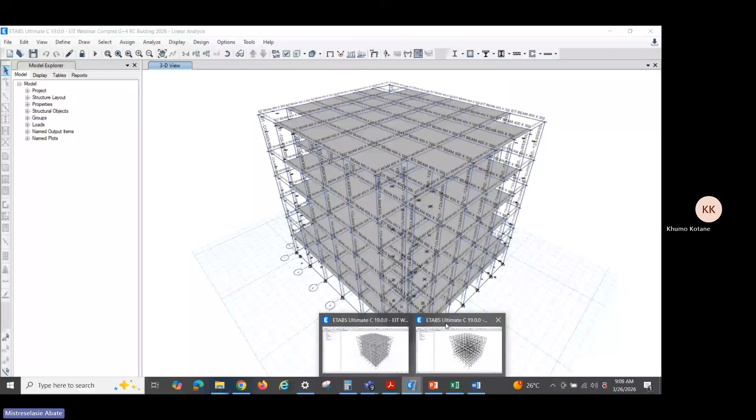Great. Okay, so what we are going to do, performance-based design in practice, and we will go here to the software also. We have ETABS software for linear analysis, and we have also another for nonlinear analysis.

So today's agenda will be structural modeling for PBD, including material property, section definitions, and load pattern and performance objectives based on FEMA 356 and ASCE. We will use also ASCE 41-17 guideline. Then we will see also pushover analysis, evaluating structural performance and overview of performance-based design. And if I can, I will show you also how to transfer from ETABS and SAP to Perform 3D for assessment, focusing on structural behavior and nonlinear analysis techniques and so on. So in general, don't worry, we are going to talk a lot today.

Module 1 will discuss why we need performance-based design and why code-based design is insufficient for performance levels like immediate occupancy, life safety, and collapse prevention. We'll cover earthquake hazard levels like service level, DBE, and MCE level, then the modeling part for linear analysis, initial code-based design, and how to transfer from ETABS and SAP to performance-based design, including material definition, section, diaphragm, and load cases.

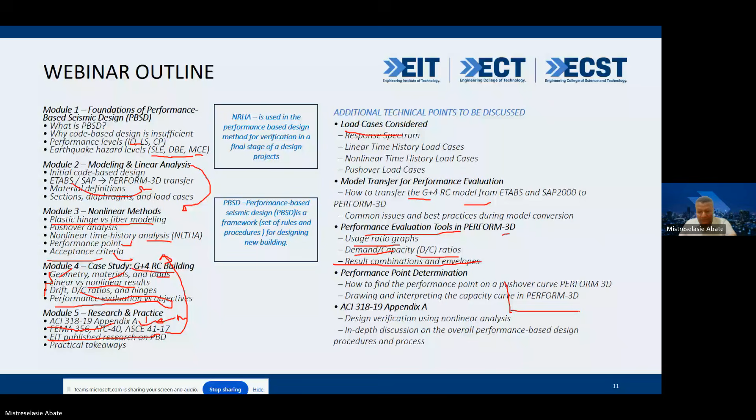For your information, at EIT we have published a lot of peer-reviewed journals, and these are published works you can read. It will give you a tremendous amount of information about performance-based design, especially global research trends in performance-based structural design and comparative bibliometric analysis. This paper tells you a lot about performance-based design, why it matters, and which universities and countries are publishing the most, along with a bibliometric analysis you can use.

For guidelines, you can use ATC, FEMA, ASCE, TBI, and ASCE 41-17, which is very important. These are the guidelines you can use. For software, you can use SAP, ETABS, Perform 3D, CSI Column - very easy software that you can find and use.

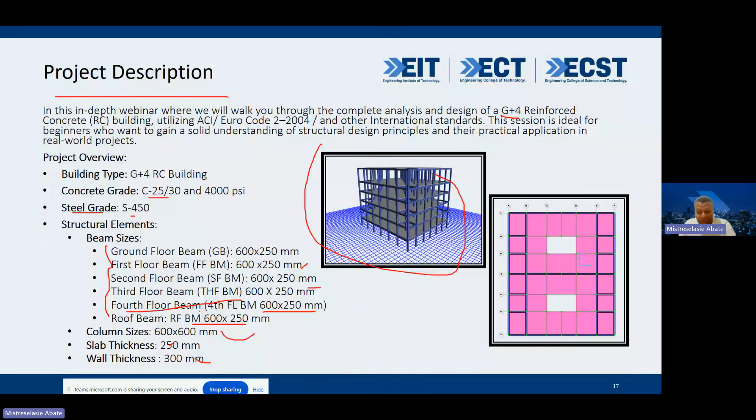For now, beam sizes at ground floor are 600 by 250, and the same for the floor level, and roof floor is also 600 by 250 mm. Column size will be 600 mm by 600 mm. Slab thickness and wall thickness will be set for initial purposes, and we shall see them in detail.

These results are from Perform 3D. After you transfer your model from linear analysis, you work in Perform 3D with a modeling part and analysis part - this is for running the model, this is for modal shape and so on, and this is for advanced analysis. Once you finish in ETABS, you can transfer the file to Perform 3D and perform a lot of analysis.

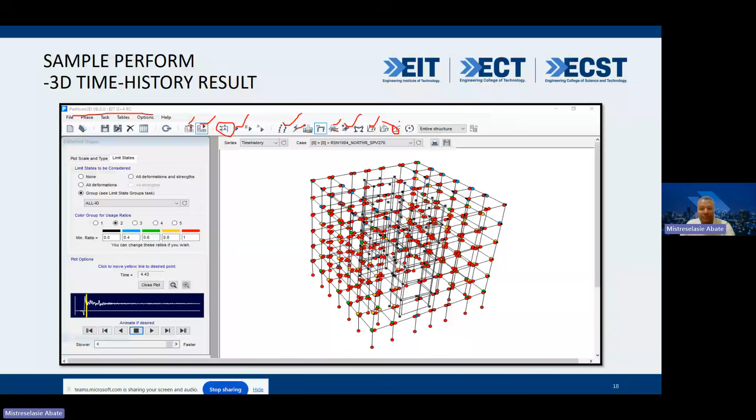As I told you, this is the paper which is published at EIT. For the literature review, we used VOSviewer, and we examined around 3,469 papers related to PBD, spanning from 1983 until 2024. From this, we tried to see the preferred journals, leading countries, leading organizations, and international institutions identified using the Scopus database.

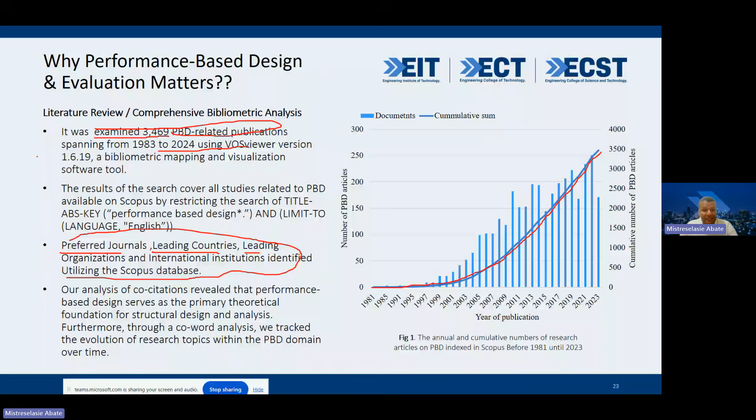As you can see from here, starting from 1981 until 2023, the awareness of PBD is rising throughout the country. Because of the difficulty, performing PBD is not a must, it is your option, and the client, if he needs to do performance-based after you do code-based, you can do it, but PBD is not a must.

For example, from there, what we see is that previous studies have lacked crucial components such as local soil condition, ground response analysis, topographic influence, active fault characteristics, slip rates, groundwater behavior, and slope considerations.

If you just adopt a code, for example Eurocode, for your country without examining the geological aspect of your location, it will be very difficult. Because if you have, for example, a small earthquake from the epicenter, and if the strata at the epicenter is rock, but your area, say 100 kilometers away, is soft soil...

You know what happens? At this point, the earthquake will be magnified like 3 or 4 times. That means the earthquake which starts from here, because of the soft soil problem, will magnify, so your structure's response will be very different. Simply adopting European code or ACI code is not the solution. Every local crucial component, like local soil condition, ground response analysis, topography influence, active fault characteristics, and slip rates, all these things should be studied.

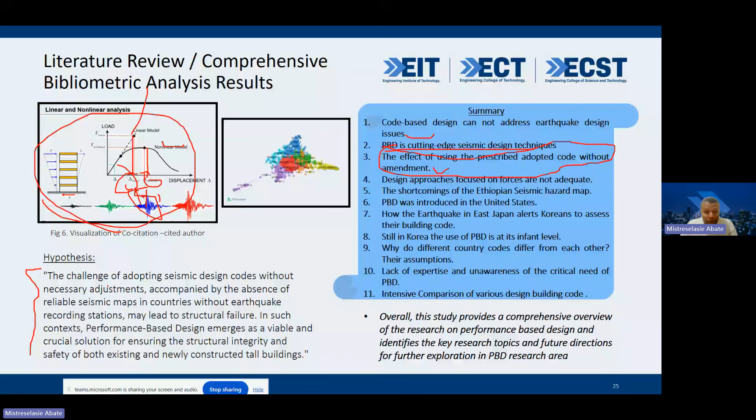So the hypothesis we made was that the challenge of adopting a seismic design code without necessary adjustment, accompanied by the absence of a reliable seismic map in the country without earthquake recording stations, may lead to structural failure. As we have seen, the magnification of the earthquake—if you have a small earthquake, because of soft soil, it can be magnified 3 or 4 times.

So if we use performance-based design, maybe that is the solution for countries which don't have a code, instead of adopting one. That's what we said.

So let's see with the general concept. The general concept is about common structural systems. As you know, we have force—lateral force like earthquake and wind—and we have displacement, and we have base shear. We have gravity loads, and we also have diaphragms, moment resisting frames, gravity frames, and foundations.

From the system, gravity load resisting systems could be vertical or horizontal—we have slabs, and beams and columns. From lateral load resisting systems, we have vertical elements and horizontal elements. For example, the vertical elements include shear walls, columns, and bracings, and horizontal elements are diaphragms like slab diaphragms.

So this one, what I mean by this, this is our linear analysis. So let's say we want to see the shear force. You can use, apply, so we want to see the shear force. If this is the shear force, for example, let's see what we can do.

I think we have the draw sections. If you draw the section here, for example, as you can see, the force like 11,263 is resisted by column, floor, beam, wall, bracing, and links. So if you just remove this, to see how much of the force is resisted by the column, now we don't have any shear wall. Because we don't have any shear wall, full force is resisted by the column. But let's go back to here.

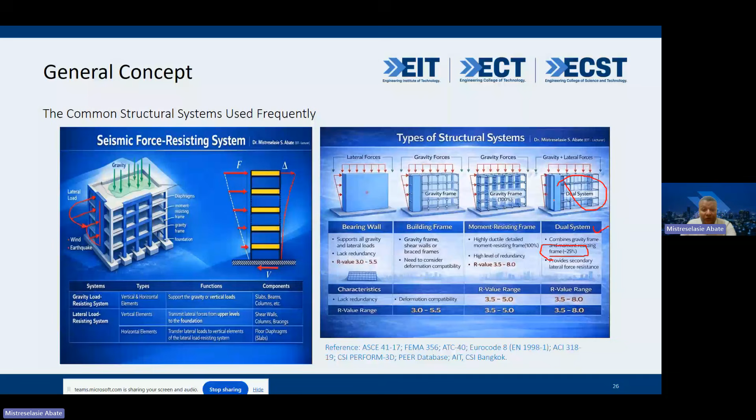So in this case, if it is dual system, at least the column should take care of 25% of the force. Even if you add shear wall, sometimes you think you are using dual system, but if 25% of the force is not resisted by the vertical system, it is not dual system. So you have to check, as we have seen now.

The other general concept, we have base shear and displacement. And if you design against linear forces, your section will be very big. But if you divide your linear forces with response spectrum, and we have overstrength factors and R factors, omega, all these things, then you're going to have nonlinear forces. In nonlinear forces, you can design with a small section, but a small section means it should be ductile enough.

You have to make it ductile. If you cannot make it ductile, it will be very difficult. It will not resist the earthquake. So you have to make it ductile enough to resist. Making a small section doesn't mean economically efficient. Sometimes you have a big section, but when you use nonlinear forces with small sections decreased by R and this, you have to take care of the ductile detailing. That is one thing we want to tell you.

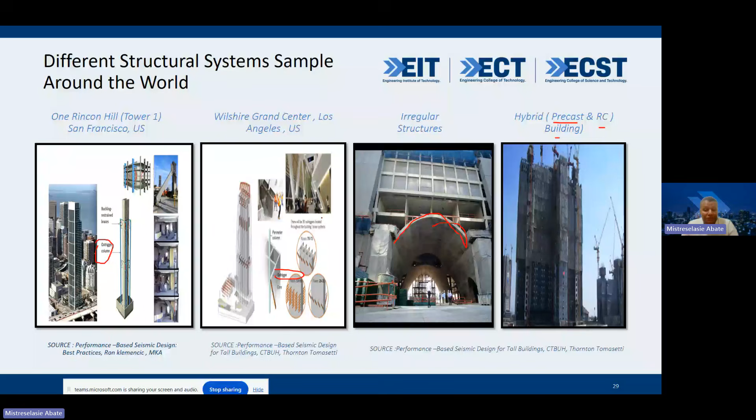And we have also different types of structure. As you can see, we have bracings, outrigger columns. As you can see also here, we have core and outriggers. And we have also here regular, irregular shapes. And we have also precast and RC buildings. So it's a combination. As a structural engineer, you are allowed to choose which structure you want.

Then the most important question is, is my structure safe? As a structural engineer, you have to ask this question. And we have ETABS, SAP, Perform, and nonlinear time history analysis, pushover, and other analysis types. And you have to make sure of the performance point.

So performance-based seismic design of tall buildings, key point of performance point: code provisions provide a minimum level of safety for all building types. And many code requirements are not tailored for tall buildings as well. So performance-based seismic design is a framework for designing new buildings. It is a framework, by the way, not a code or something. It will give you alternative design with predictable and safe performance under earthquake conditions, and it requires more effort. PBD is not like code-based design; it needs more effort in analysis and design.

The other thing for developers and structural engineers: make exceptions to the specific limits, code limits, for seismic force resisting systems, for example, and utilize advanced seismic systems not in the code, like outriggers, as we have seen, and use high strength materials, devices, base isolations, and tuned mass dampers.

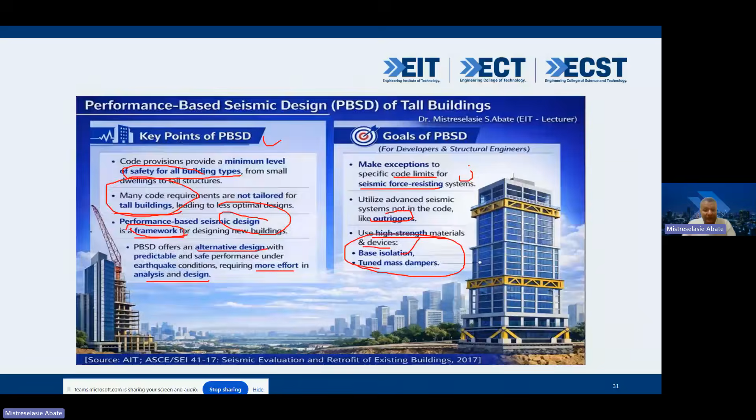Then when we come to the building industry, there's dependence on codes and standards. Key role of building codes: first, they establish requirements and provide standard solutions, outline detailed procedures, draw from experience, and ensure the code guides and defines estimated hazard load levels and prescribed limits on structural members.

As you know, disaster equals hazard times vulnerability and exposure, and hazard times vulnerability gives risk. So to reduce disaster risk and increase safety, we need to accurately assess the hazard and mitigate vulnerability.

The other thing is prescriptive code protection and practical limitations, for example from the public perspective, owner perspective, and engineer's perspective.

The public always asks: will this building protect occupants during an earthquake? This is their concern. Is collapse prevention adequately addressed? This is what they are asking.

The owner will also ask: will the structure remain standing after strong shaking? Can the building be occupied immediately after the earthquake? How severe will the damage be? And how long will recovery take? This is the concern of the owner.

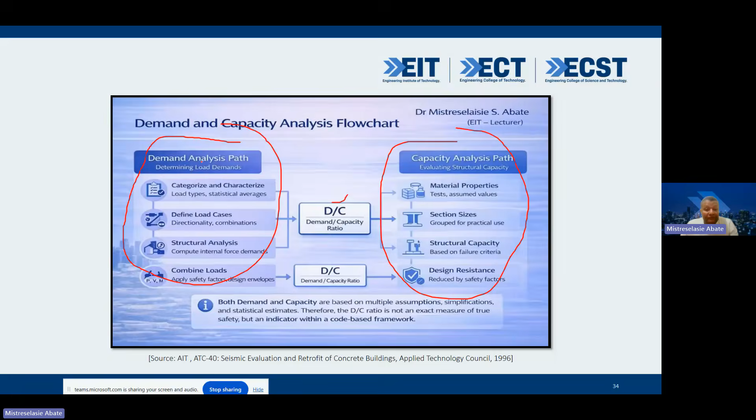But even with the DC ratio, there is a lot of uncertainty on both the demand side and the capacity side. For example, on the demand side we have load type, statistical averaging, definition of load case, structural analysis, and combination of loads and envelopes. On the capacity side, we have tests where we assume some values, and we have section sizes based on failure criteria reduced by safety factors.

So both demand and capacity are based on multiple assumptions, simplifications, and statistical estimations. Therefore, the DC ratio is not an exact measure of true safety, but an indicator within a code-based framework. This is very important: in the code-based approach, both the demand side and the capacity side have a lot of assumptions, so we cannot fully rely on code-based design.

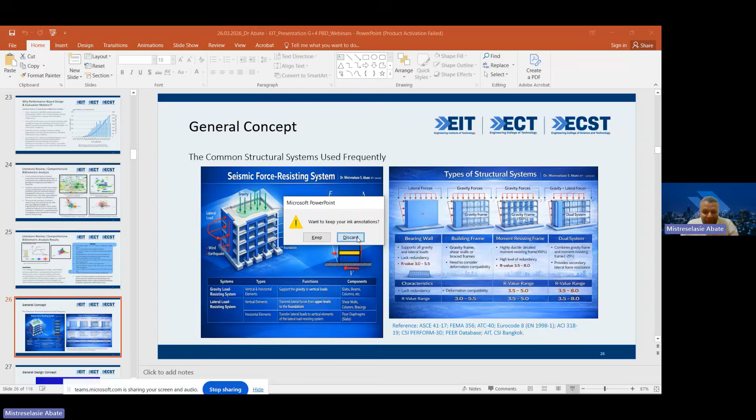So before we go to performance-based analysis, let's go to linear analysis and discuss it. So this is our linear analysis. The first thing we are going to do for performance-based analysis is model the linear analysis.

In the modeling, you have to define materials, as you can see, concrete and all these things, like weight per unit. Once you choose the code, it will populate values for you - ETABS is very helpful here - but you have to also correct them. For example, weight per unit volume 25, mass per unit volume, and modulus of elasticity. For concrete, you can also set the Poisson ratio, for example 0.24, for uncracked sections - if you make it 0, it will be cracked sections, and so on.

And for steel, the same applies - this is for tendon, and as you can see here, this is for rebar. So we also have to define the rebar.

The first thing is from definition, then from here, section definition. In the section definition, you have to define the beam section and column section. For example, for a beam, the most important thing in the cross-section definition is the modifiers. As you can see, for modifiers we give 0.5, 0.5, torsional constant 0.1, and moment of inertia 0.5, 0.5.

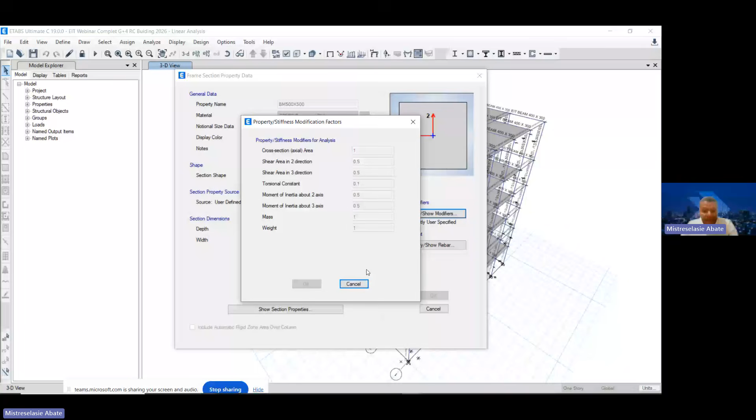Even we can see one example later. For example, in the section definition of a slab, in the modifier, you see modifier for membrane action and bending action, because we don't have shear action. Shear action is for thick slabs, but in the thin plate, we have membrane action and bending action. So for these two actions, you can give 0.25.

If you don't give 0.25, let's see what you will get. Let's go to ground floor, for example, and see the moment. Let's see also the value.

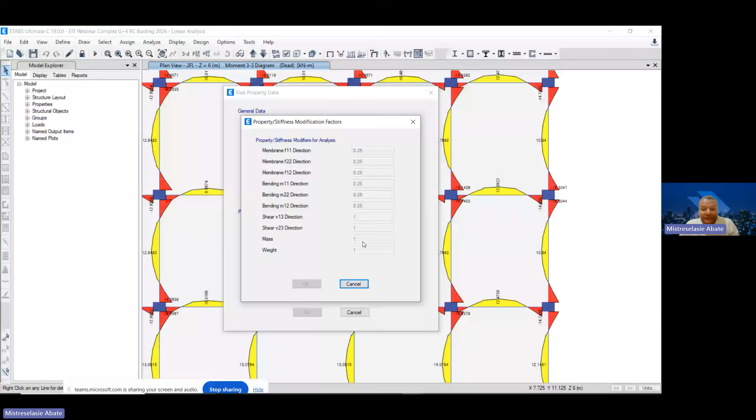For example, if we see here 12, 12, 10, 10, this is the moment transfer from slab to beam. But if you make the slab modifier 1, 1, 1, 1 instead of 0.25, 0.25, the moment will not transfer into the beam, and you will get very small moments. That means you will not get the required amount of reinforcement. It will not transfer the load from the slab to the beam and from the beam to the column.

So what I told you now, in the material definition, you have to take care whether it is a cracked section or not. And in the section definitions, you have to take care that you give modifiers in the slab.

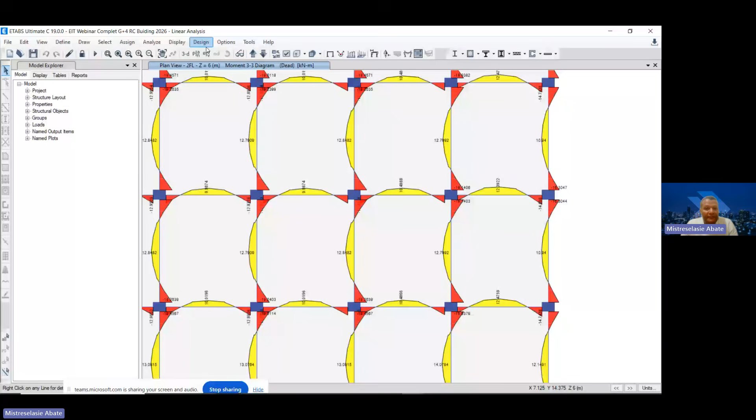The other thing, what you have to do in the preference, if you come here, you can choose the Eurocode. As you can see, we are using Eurocode. And the load combination also, we have two load combinations, 6.10. All these things you can go and see.

Very important. When you do like this, it will give you the BC ratio, this one is for the column. Column should be designed to make sure that the beam column capacity ratio remains within the limit, that means the beam moment should be 30% less than the column, because the beam should fail before the column. If the column collapses, it's a global collapse, all will collapse. But if the beam collapses, it will be local collapse. So you have to take care of this.

The other very important thing, as you can see here, theta. This will be for the imperfection case, we use this here. So even if you don't define a load case for a notional load in your load case, if you make 0.5 here, already the notional load case is assumed for the imperfection case.

The other thing is gamma steel and gamma concrete, you know that 1.15, 1.5, and alpha CC for compression and tension. If your location for concrete is very good quality, you can adjust it, otherwise 0.85, 0.85, you can do that. And the other thing, this is for post tensioning, this is for top fiber and bottom fiber. So you have to take care of these things.

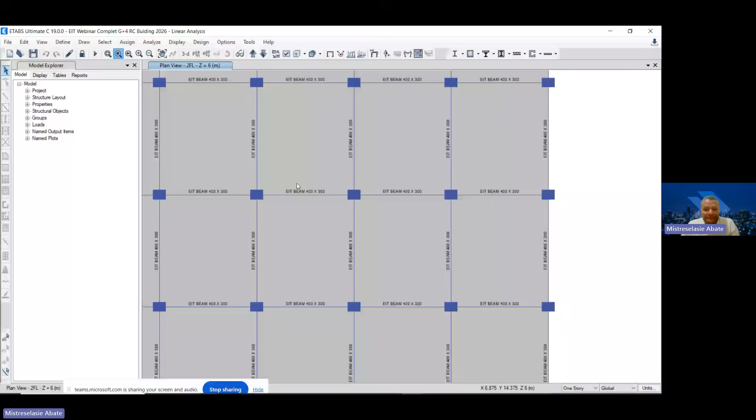The other thing, what we do, the diaphragm also, we have diaphragm. Let me make it like that, and here, and here. But in our second video, we gave you step by step how to design. This one is only for your information.

What I want to show you now, hinge and... can you see here? Sorry, this one, diaphragm extent, I want to show you here. This is the diaphragm, this is the center of mass.

And for center of rigidity, you have to go here and if you click calculate diaphragm center of rigidity, then after calculation, the software will give you the difference between center of mass and center of rigidity. As much as possible, the distance between the center of mass and the center of rigidity should be lower. Otherwise, you're going to face torsional irregularity, that is the problem. So as much as possible, the center of rigidity and center of mass distance should be lower.

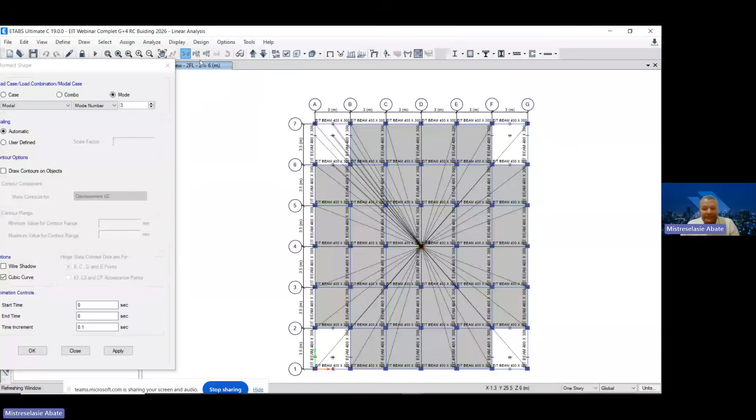Otherwise, if you go here, let's try, maybe it will take time, but for example, in the mode shape, what you are expected is that mode 1 should be translational in the X, as you can see, this is translational. And mode 2 should be again in the Y, translational. And mode 3 should be torsional, you see, so this will be torsional.

Maybe let's start. Sorry for this.

Depending on the specification of the model. Okay, anyways, so this is what I want to show you, okay?

And the other thing in the definition, all these things and the mass source. Some problem in the mass source, some people take element self mass and additional mass, specified load pattern. If you take these three and add load, the dead load and the element self mass will be added together, and that will be a problem. So you have to take care. If you check specified load pattern, you don't have to check elements.

And we don't need vertical masses because we need lumped mass. This is lumped lateral mass and the included lateral mass. And this one for live load, we need psi2. There is a coefficient from the code, that's what you have to use here.

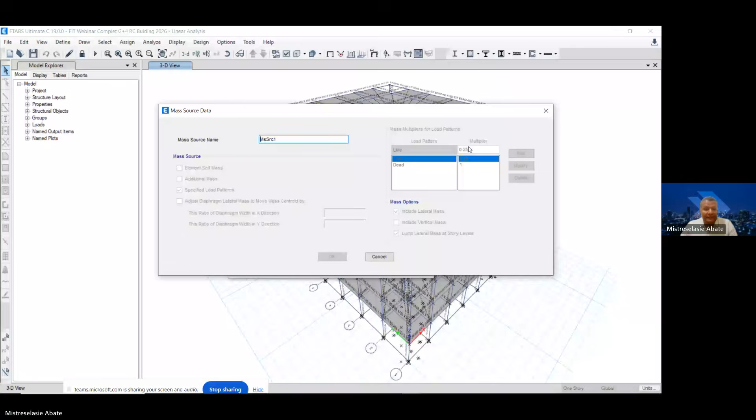And the other thing, load pattern. This is the load pattern we have. And in the load cases, for this demonstration, we use almost all equivalent lateral force procedure, response spectrum, as you can see. And we use ELF, equivalent lateral force procedure. And after that, we use linear time history analysis. This is linear time history analysis in both directions, and we matched it, okay?

And how to bring, let me, if we have the, for example, okay, this is PEER ground motion. You go to the PEER ground motion database, and in the PEER ground motion database you can download different earthquake data. Okay, these earthquake data will give you.

Okay, these earthquake data will give you, I will show you here. For example, this one, modify. Here, define function and time history analysis. Oh sorry, because it's not reading. For example, this one, modify, show, because the data I took is, this is how you define it.

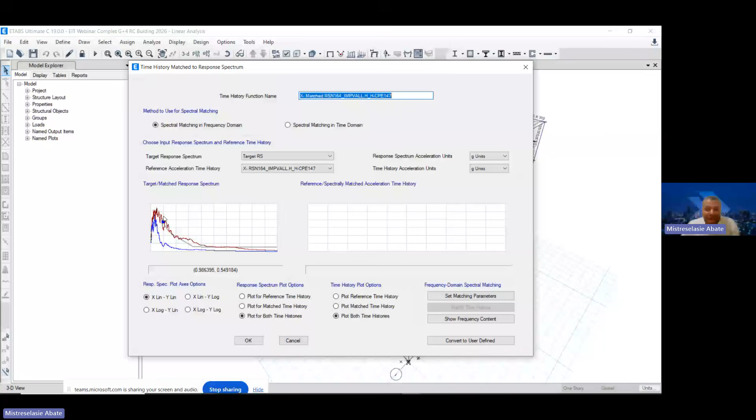Okay, when you match, you can come here, and the most important thing is when you match from 0.2T fundamental period to 2T, the matched data should not be less than the target response spectrum. Because here what you can do, define response spectrum. This is the target response spectrum. For our case, we use this target response spectrum because this is the site response spectrum. So you have to match it with this response spectrum.

Okay, so that is another concept, because matching for performance based design is very important. For performance based, first you have to bring the data from file, and now it is already locked, it will not take it. You have to bring the earthquake data. Once you bring the earthquake data like X and Y directions, you have to match it, match to response spectrum. When you match it, you will match it in the frequency domain and the time domain.

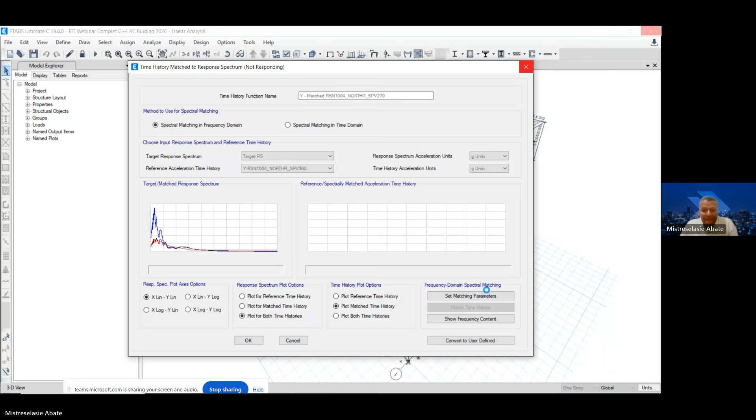Okay, then whatever it will give you, for example the matched one, you can use this one. What we want to see, I think it's not responding also. This is the linear analysis. In the linear analysis, you have to do all these things, and you have to design your structure, and get the section and the reinforcement, everything should pass.

Okay, I don't know, it's not responding until it's responding. Let's go back and let's continue our discussion. Okay, let's say now we are okay with linear analysis. Then what we are going to do is change the building to nonlinear analysis.

So what we are going to do, let's go to here and we will come back there, okay? And I hope this one... Okay, we will come back here in a minute. Let's open that linear, the linear one. Sorry, it's crashed.

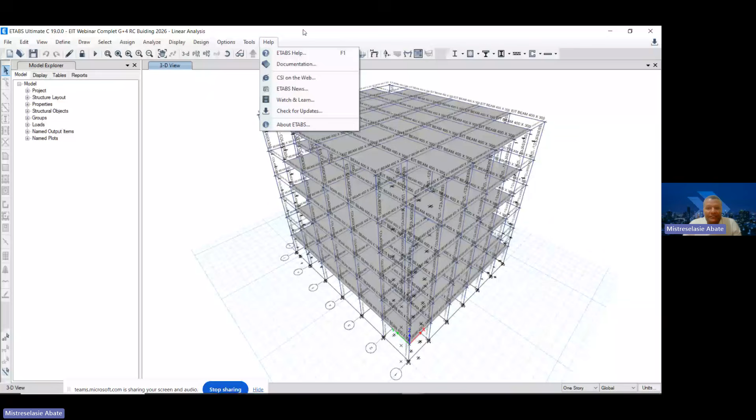So this is the analysis already done. We check the preference, everything, and let's say we see everything. So let's design now.

Now the program is designing. So as you can see here, the design is over. This is the reinforcement you will get.

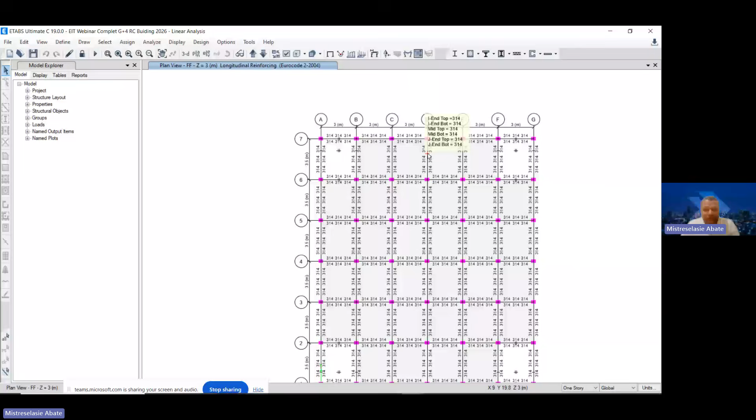And let's say we want to see the beam, and let's see the detail, for example. As you can see, this is the beam. Everything you give, the section, the elastic modulus, FCK values, ASA, FYK, diameter, gamma C, alpha CC, all these things.

here area of steel is given already, okay? Area of steel is given because the concrete capacity is 43, and the demand is 44. So if the shear carrying capacity of the concrete is less, then we will provide steel reinforcement.

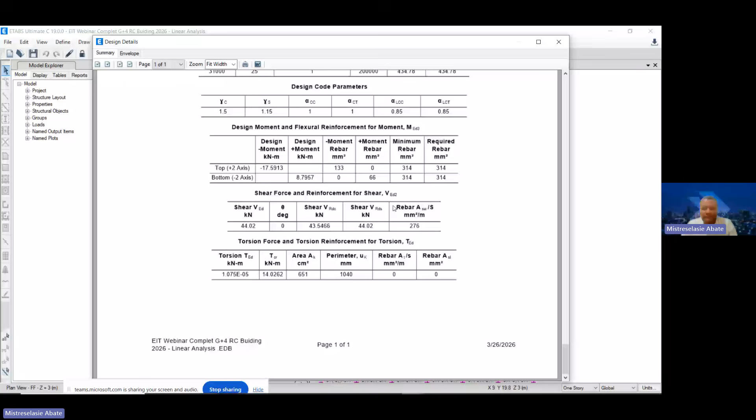And you will go here, and the other thing, for example, you have to go here and display design information, and you have to see all this rebar percentage, shear reinforcement, column PMM interaction, beam column capacity ratio, column beam capacity ratio, joint shear capacity ratio, torsion, shear torsion, and general reinforcement.

If you don't want, you have identify all failures. So if you go here and say identify all failures, maybe in some areas you might get some kind of failure. So take care, okay? Maybe this kind of failure also, even if the reinforcement, everything is passed, maybe you will see some kind of failure.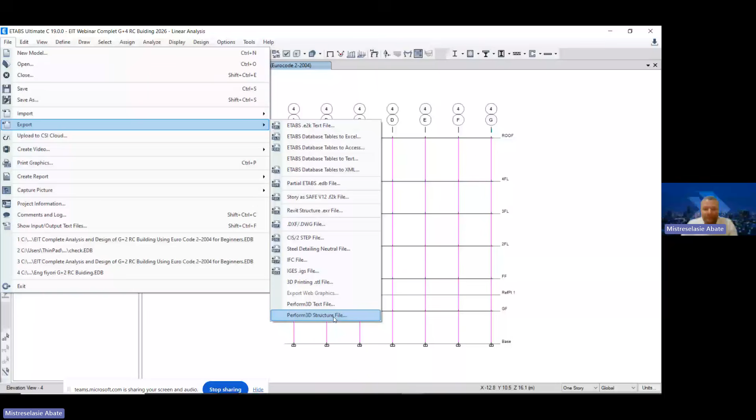So once you are satisfied with this, as you can see here, you go to export, and here you see performance based, Perform 3D text file or Perform 3D structural file. If you want, you can transfer this file into Perform 3D. But for performance based, this is the initial point.

You have to know the reinforcement, okay. So display, and for example, longitudinal reinforcement. Now you should know this amount of reinforcement. After that, we will go to

nonlinear, okay. We will change the model, and I will show you how performance based will be used. So let's go to our presentation now, and we will come back later. So this is performance based basics.

As you can see, we have linear analysis and nonlinear analysis, and we have equivalent lateral force procedure, response spectrum, linear time series analysis - this is direct integration, using the concept of mode shape. And when you come to nonlinear, we have pushover, nonlinear modal response time series analysis, and nonlinear time series analysis, which is also the same - this is fast nonlinear analysis.

Linear analysis procedure: material stiffness property remain constant, no yielding, damage, or other things. And when you come to nonlinear analysis, we have cracking, yielding, damage, and the expected modeled nonlinear stiffness varies. So linear analysis assumes constant stiffness and pure elastic behavior, while nonlinear analysis captures actual inelastic response, damage, and stiffness degradation. Therefore, nonlinear analysis provides a more reliable measure of structural performance.

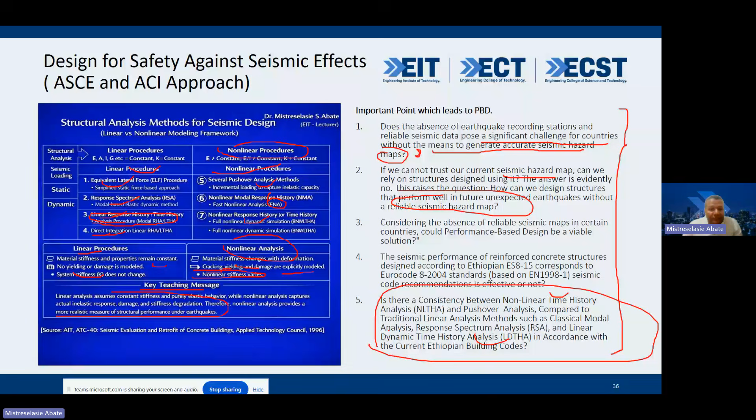And after that, all the solution, linear and nonlinear results will be checked. So this is the idea. As we have discussed, we have MCE level, we have DBE level, and we have design level.

And without any guess, you can know the performance of your building.

That is what the performance based design in this simple structure is showing. So from the design, as you know, we had intuitive design and code-based design, performance-based design, and consequence and risk informed, resilience. So this is the criteria we are going with. This is what I told you now.

If you have steel, you have the stress strain curve, and for concrete too, and you have to put this into your structure. We have the moment curvature and moment rotation you apply in your building. Once the earthquake comes, it will show you the immediate occupancy, life safety, and collapse prevention levels. This is the hinge. So this is performance-based, using real material property and expected values.

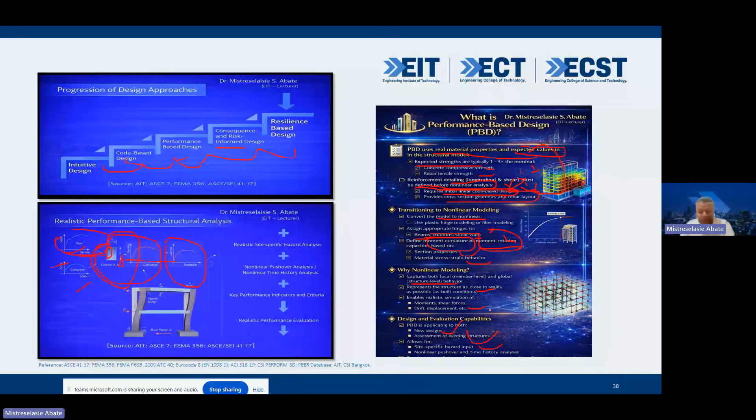They are used. So this is the same thing, performance-based workflow. First, you have to do linear analysis, but you have to start from architectural design, and you have a linear elastic model and determination of true capacity. So for linear elastic, you can use ELF or response spectrum analysis to do the job for you.

After you do that, we go to advanced nonlinear analysis. This will be SLE level, service level, and MCE level analysis, with performance assessment at SLE level and MCE level. Then check the acceptance criteria. If it is okay, success, complete design. If it is insufficient, then you have to go back to linear and change the section.

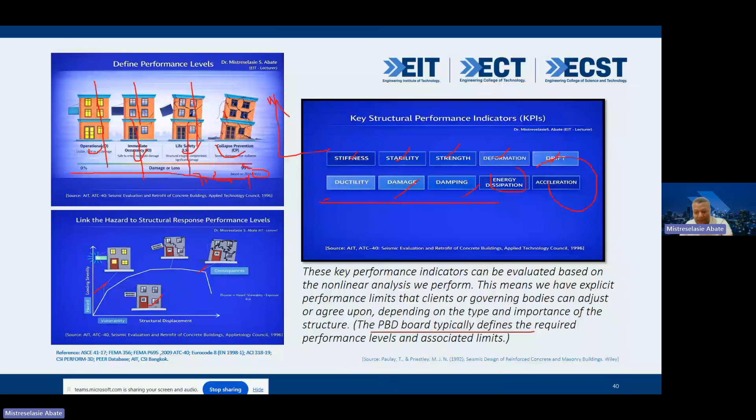For your criteria, key structural performance indicators, you have stiffness, stability, strength, deformation, drift, ductility, damage, damping, energy dissipation, and acceleration. All these things will be agreed upon in the board, the PBD board. When you have performance-based design, you have to accept how it should perform. What percentage of, for example, immediate occupancy could be, or life safety maybe 70% of collapse prevention or 60%. These kinds of things will be agreed with the performance board.

This is the PBD methodology we used in our project for a 44 story and 100 story building. We performed performance-based design, trying to analyze all linear and nonlinear analysis. As you can see, modal analysis, response spectrum analysis, linear dynamic time history analysis, and pushover and nonlinear time history analysis were performed. This is what we have discussed now.

The other thing, this is the earthquake data we used from PEER ground motion database. We extracted Imperial Valley, Landers, Northridge, and all these earthquakes were extracted from the PEER website. The idea is that for linear or nonlinear analysis, both procedures are the same.

You have a target response spectrum, and once you have the target response spectrum, you have to scale it. For example, before scaling, the earthquakes may look like this - all 11 earthquakes scattered like this. But after that, you have to bring it down to your response spectrum by matching and scaling, and from 0.5T fundamental period to 2T fundamental period, these values should not go below the response spectrum. Then the result you get will be, for example, these 11 matched records.

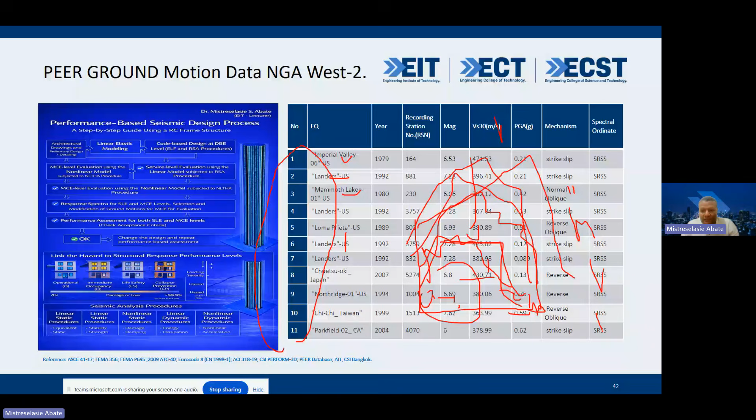So you are going to get 11 results: 11 moment, 11 shear, 11 drift, and all this we will see later. Then you have to average it, okay? M1 plus M2 plus M3, something like that. This is the matching I was talking about.

You have frequency domain and time domain. Sometimes time domain will give you good results, but it will take too much time. Frequency domain is lower, but the matching value it gives is not that good. So you can check both, and this is how you match and scale.

Performance-based building code: prescriptives specify fixed criteria and procedures that construction must adhere to, and engineers don't explicitly assess the structure's real performance, restricting the use of advanced structural systems, which leads engineers to assume. But when you come to PBD, you are flexible—engineers become like architects, they have a chance.

It addresses the limitation of prescriptive code by making seismic performance objectives, ensures greater building safety through detailed evaluation, allows exceptions to standard code requirements based on performance assessment, and encourages the use of innovative and cost-effective building. So it enhances structural performance, improves cost, and achieves a lot of objectives.

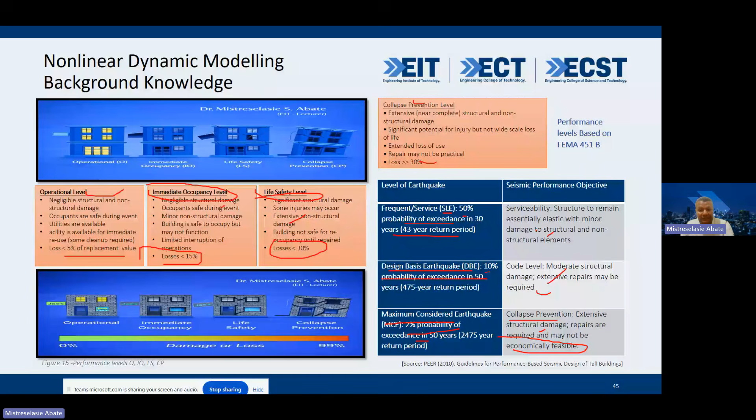For collapse prevention, extensive structural damage repairs are required and may not be economical. For code level, the DB level, moderate structural damage, extensive repair may be required. For service level, the structure remains essentially elastic with minor damage to structure and non-structural elements. This is MC level, 2/3 gives DB level, and we have service level.

And this is the damping ratio recommended: 5%, 5%, and 1.6%. This is the formula for return period. This is also the same for evaluation purposes—service level as we've seen, and MC, and roof drift 1.5 to 2.5, this is for damping basically. This is also 2%, and these are the issues for SLE level, DB, all discussed.

So you can go ahead and see the same information and the remarks here, the purpose why you do MC level, DB level, and service level.

So service level evaluation, just use a linear model as discussed, the response spectrum. You can use response spectrum and critical damping from 1.5 to 2.5. Load combination also the same: dead load, live load, reduced live load 25%, and earthquake. When you take earthquake, 100% in X and 30% as per code; once you take Y 100%, then you take 30%. Then R factor, omega factor, CD factors are all taken as unity.

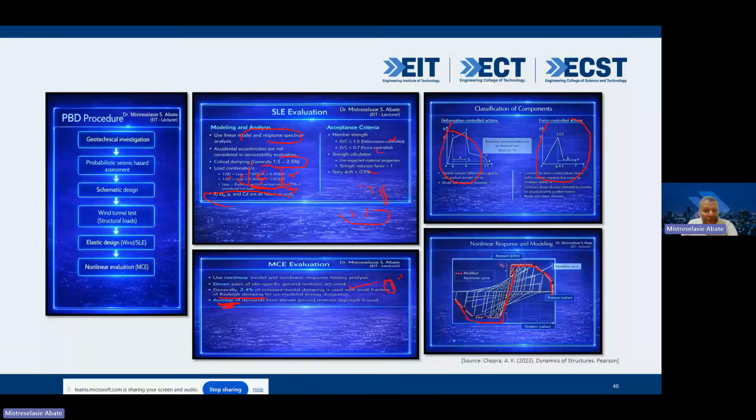So we have deformation control and force control. This is for the hysteresis loop, okay. We have this as per the test, and we will use this backbone curve. This is the nonlinear modeling we will use. As you can see here, this one is force controlled, this one is deformation controlled, and this should be force controlled. The behavior is ductile for this one, and for this one it is brittle.

We have critical and ordinary, we will see it. The main consideration on which item to check for performance, we have discussed this. All these global and local responses will be checked.

Now when we change our design from linear to nonlinear, for example this is fiber modeling. If you are using fiber modeling in ETABS, it will automatically give you, for example, this is the confined area. For shear wall, we have edges, and we have unconfined and confined regions, depending on the design.

Then we have rebar fibers, as you can see here, and we will give a stress strain curve. And we also have concrete fibers, so a stress strain curve will be given for concrete as well.

One thing I want to discuss here is confined and unconfined. This is the unconfined case - if it is unconfined, you see the capacity is very low. But if you use full confinement, it will go up to here. So confinement is very important.

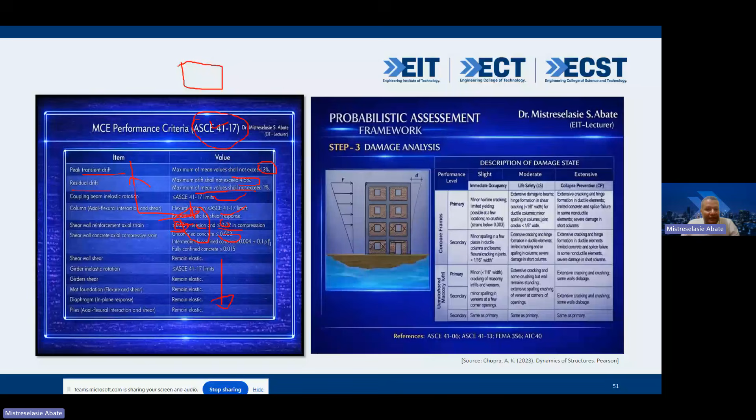It will give us everything about rotation, moment rotation, the capacity. Once you have the section and the rebar - top rebar and tensile rebar - this is for compression and tensile, and it will give you the capacity.

This is also damage analysis. You can go ahead and see, for example, primary and secondary for concrete and for shear wall. We have immediate occupancy, life safety, and collapse prevention, and it will give you this.

This is the damage we have seen. The different codes will give us this inter-story drift - 1%, 2% for moderate, extensive, and complete damage.

So this is the ASCE 41-17 modeling. Once you know the bar, tensile bar, row for bottom, row for above, rho balanced, and if you know shear, BD, and FC...

Using this - that's why we are doing performance-based design, why we do linear analysis - it will give you these values. Once you know this value, ETABS will extract these values, and it will give you the plastic hinge angle, these modeling parameters, and acceptance criteria.

That's why in performance-based design we did linear analysis - to know the capacity as per these codes.

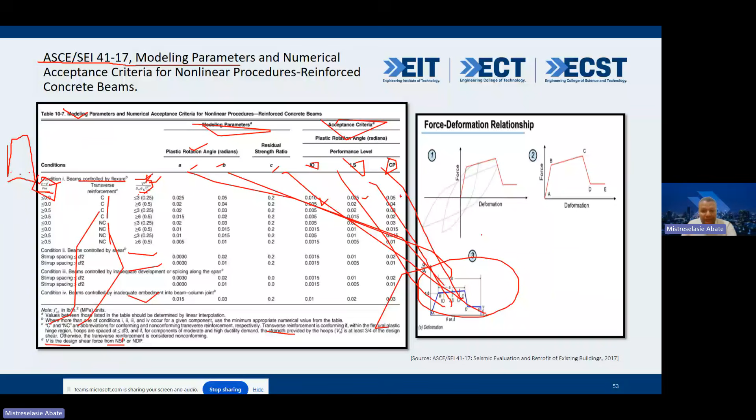So for you, once you know this, you assign this in your model. Then when the future earthquake comes, your building will capture the immediate occupancy, life safety, and collapse prevention.

So when we say rotation, this was done in UCLA - this is the report. So when we say 0.01 rotation, you see the structure is almost in good condition.

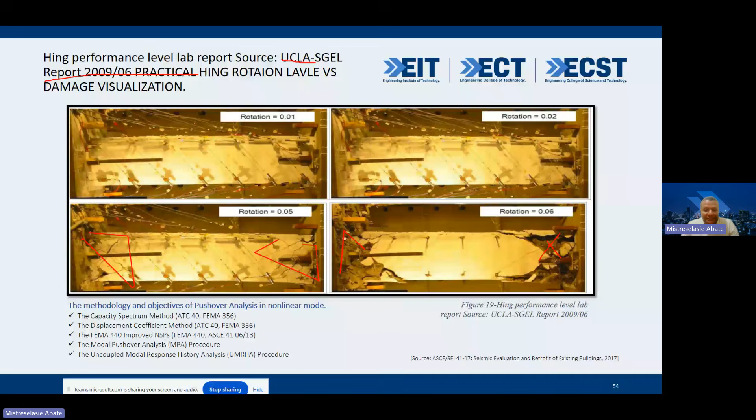When rotation is 0.02, there are some cracks. When it's 0.05, almost damaged. And when it's 0.06, it is already damaged. The plastic hinge model passed already. So at least to know this, the rotation is good. It will show us.

And this is hinge assignment. This is how we assign the hinges. I will show you now. This is for fiber PM3. If you have a shear wall, we have fiber. This is for the pushover case, and this again for pushover. This is load case pushover. This is for the beam M3 hinge, and we will see it now. This is the force deformation, with immediate occupancy, life safety, and collapse prevention. It will take from ASCE 41-17.

And this is for the shear wall. So, prescriptive code versus performance-based design.

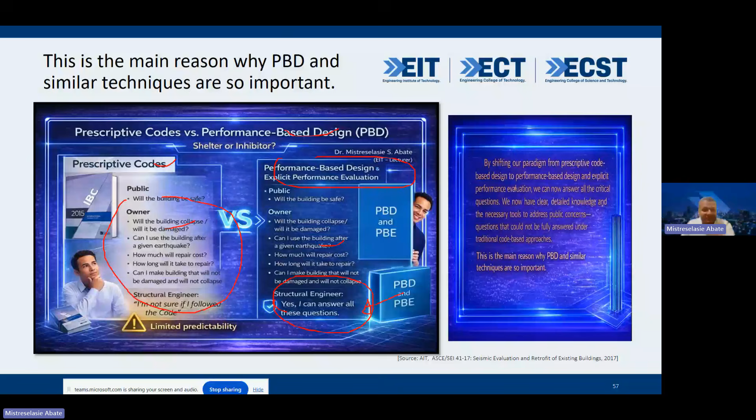Public asks: will the building be safe? Will the building collapse? How much will the repair cost be, and everything? If a structural engineer is using prescribed code, we don't know. The engineer will not answer these questions. But if we are using performance-based design, we know the capacity, we know the life safety stage, we know the collapse prevention, we know everything. So will the building be safe? Will the building collapse? Can I use the building after a given earthquake? All these questions, if the engineer is using PBD, then he can answer. So by shifting our paradigm from prescriptive code-based design to performance-based design, we can answer. We can answer. So this is what we have seen.

Why start performance-based design with the client? Performance-based design begins with understanding the client's objectives. For example, when a client asks what is the benefit of applying PBD to my project, and why should I use PBD, our response should be: performance-based design achieves a high and clearly defined performance level compared to conventional code-based design. It provides reliable and certified performance outcomes based on explicit engineering evaluation, delivers documented performance objectives, and offers a formal performance certificate and so on. The client value proposition improves safety and reliability, reduces uncertainty about damage, and gives greater confidence.

We have seen this already: MC level, DB level, all the same. And this one also: occupancy, immediate occupancy, life safety, and collapse prevention. So any repair or minor damage to partitions, and near collapse, this is very little damage. And as you can see, we are giving percentages. This is CP 99. For example, life safety may be 70%, and immediate occupancy you will give 30 or 20.

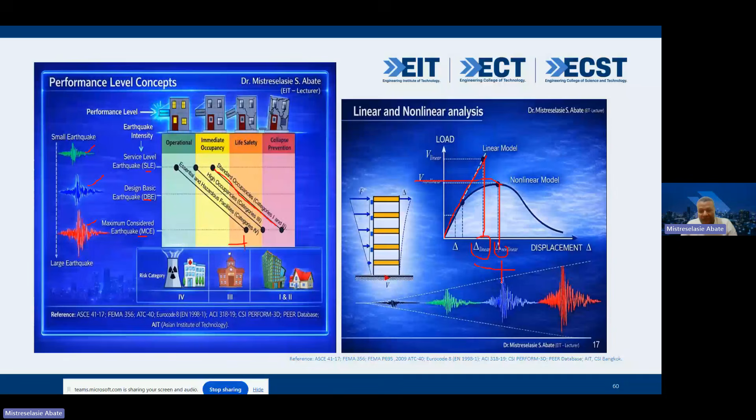As we have discussed, if you use linear analysis, this is the result you will get, and if you use nonlinear analysis, this is the result. This directly gives you different results. So linear analysis is not adequate.

Then again, performance objectives, as discussed, service level and MC level. For material, you have to use expected strengths. This is the linear model, this is the nonlinear model. Damping is most of the time 5%, 5%. And the response spectrum, as discussed, dead load, live load, reduced live load, and earthquake 30% X and Y. For nonlinear, no reduction, only live load, but this one uses 1, and you have to use 11 pairs of ground motion.

Linear or nonlinear analysis, also the same, 3 pairs of ground motion. By the way, linear analysis and nonlinear response history analysis are all the same, only the model is nonlinear. For the load reduction factor, as you can see, this is 1 here from 1.3 to 1.5, and FU is just 1. For response spectrum, DCR is 1.5, and nonlinear DCR is 1. Both here, it should be 1, DCR, demand capacity ratio should be 1 for both. But for force controlled, they will reduce to 0.7.

So this is the initial information from the architect, then code-based design. Once we do code-based, we do performance analysis. For performance analysis: service level and immediate occupancy, structural model analysis, modeling analysis, and evaluation. Does the performance meet the selected objective? If yes, then peer review, then report. If no, again we go back to code-based, because soil report plus seismic hazard assessment, wind tunnel test, are all required in the code-based process.

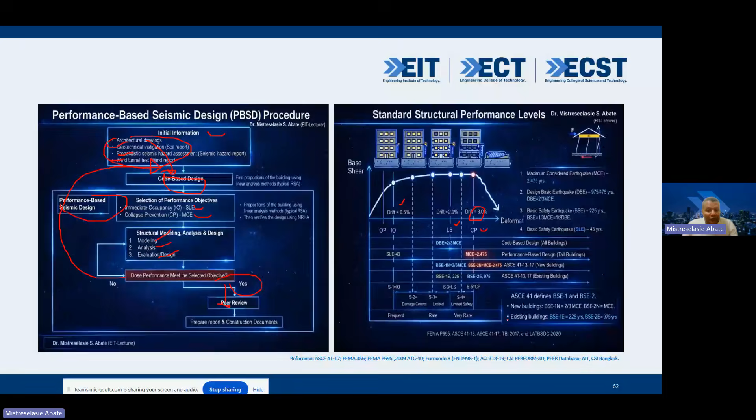General concept, a minimal level of safety for all buildings at MC level, and alternate design with predictable safe performance, and height limit of selecting seismic force resisting systems. But here, no limit, as we discussed, performance based to give us the option.

And these are also load combinations, okay, so for serviceability limit state, and earthquake, and quasi-permanent also, and imperfection loads will be added. And this one also, as you can see, dead load, live load, and earthquake. And brittle, if it is brittle, 1.3 to 1.5 times, and ductile, the mean demand.

And capacity, you see reduction factor, this code will take from 0.65 until 0.9, but here we don't use it. And material property, as we said, concrete strengths and steel strengths. And for the performance, as we said, expected strength 1.3, 1.17. So DC ratio 1, as we discussed. And from here also, you can see 1.17 for steel and 1.3 for concrete. This is expected material also.

And the stiffness modification, as we have seen, is very important. So for service level and for MC level, they will give you for flexure control and shear control different recommendations, okay? The most important concept in performance-based design is the capacity design concept, okay?

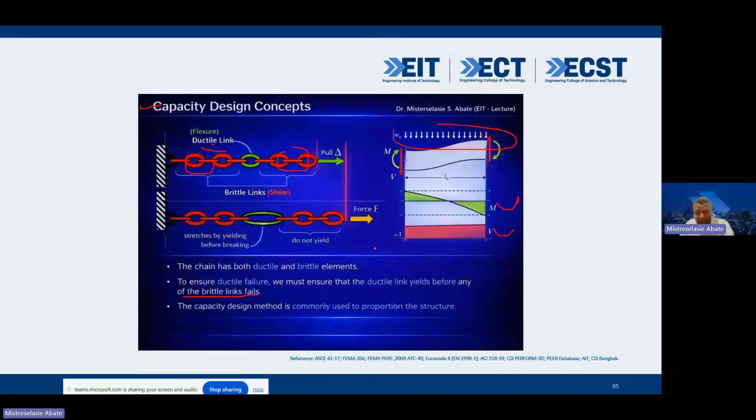And this is the idea of performance based design, because if you make all your building ductile, the computational power will take a lot of time. So you have to select which element, like coupling beam and shear wall areas and in the beam. Some places you have to select and make a plastic hinge there, okay? Otherwise, if you make all your building nonlinear, it will take too much time, because nonlinear takes too much time. So this is the capacity design concept.

The other thing, component classification, as we discuss now, we have deformation control and we have force control. And in the force control, we have critical action and ordinary action. This one already in the code is included. You don't need to memorize. I bring it here for your information.

So deformation control means it undergoes nonlinear behavior, yes? But force control means it is not expected to undergo nonlinear behavior. And for critical action, this is the most important, the force control action, the failure of which is likely to lead to partial or total structural collapse. This is critical action. But for ordinary action, it is not, okay? It will not lead to the whole collapse.

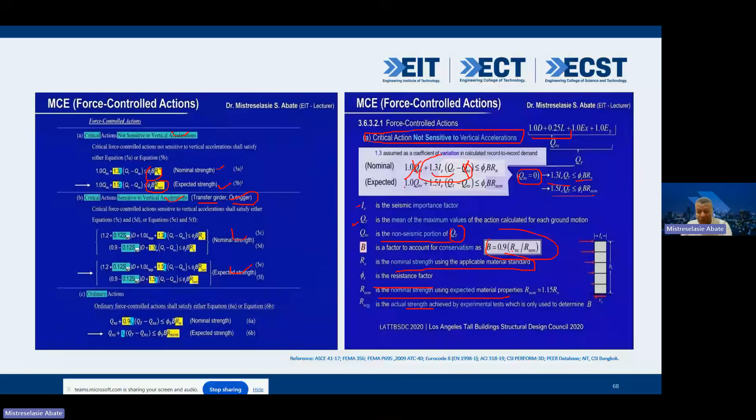You see, everything is given here, critical, ordinary. The only thing you have to choose is which structure you have. For example, if it is code, then the phi and the b factor is already given, so no need to calculate. Only in the code, everything is given, so you can multiply it here and get the capacity.

Again, here we have this for deformation controlled actions. We have acceptance limits, okay? Different regions in the shear wall, the code gives us what will be the acceptance limits. You can use those. This DC ratio should be 1. This is for the tension side, this is for the compression side. This is also, we should know, no confinement.

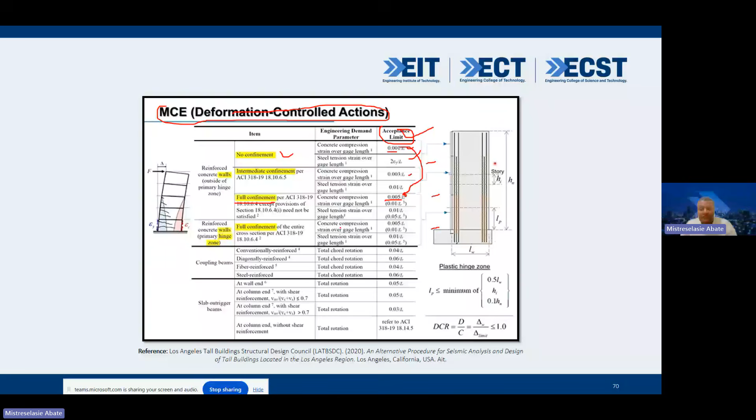Now application of PBD, you can see for San Francisco, and this is also Philippines. Almost in the US, everything is performance-based design. So before we go now, this is the result in Perform 3D, and this is in ETABS. And this is what I want to show you in the lab.

Seismic retrofit of rectangular bridge pier. What they do is lateral displacement. We have lateral displacement and base shear. So we have the gravity load and we have horizontal. So they will apply loading and unloading, and they will make loading and unloading. Then we get the hysteresis loop.

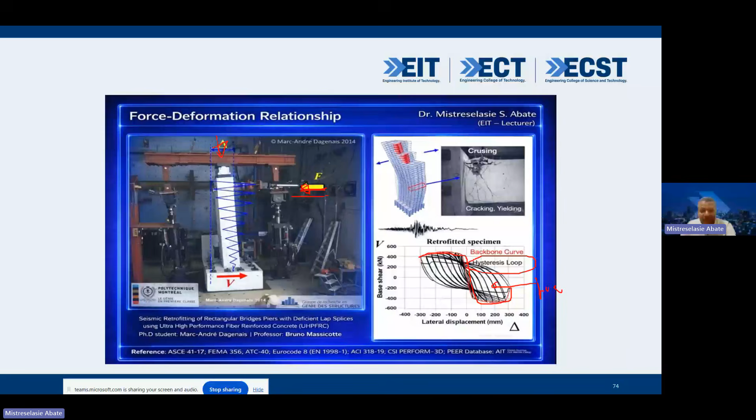Once we get this hysteresis loop, we will get the backbone. And the rule also required for loading and unloading, because this is the energy under this backbone. It will tell us the amount of energy, cracking, yielding, crushing, all these things. So this is just to remind you.

As you can see, this is the initial yield point. This is first yield point. This is the strain hardening area. This is ultimate strength, this is ductile limit, strength loss, and residual. This is the force deformation behavior.

And this one also, immediate occupancy. And we have life safety and collapse prevention. As you can see, life safety is around 75% of the collapse prevention. This is as per ASCE 41. Wide range, as we have seen now, ASCE 41 almost gives us everything. Okay, this is the ASCE 41 again.

Once we have the rebar and the section and the shear and the B and the D values, then we can have everything we need. Okay, so the concrete is this one.

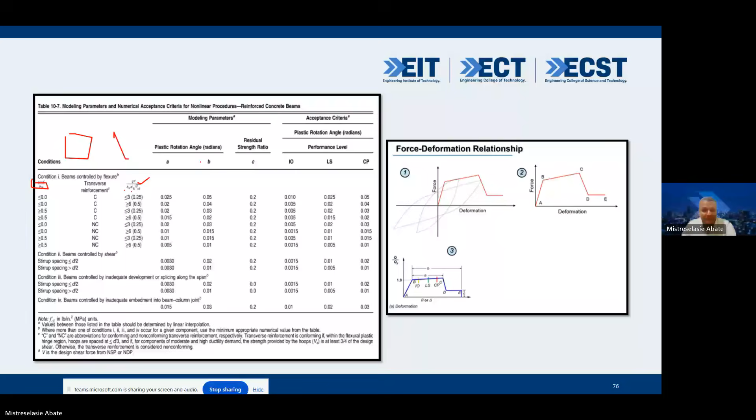So we have different kinds of hysteresis loops, from the difficult one, complicated, to the most complicated one. And we have also EPP, we have reinforcement steel, for example this one, and exaggerated pinching and concrete models, okay.

This is the idealized nonlinear modeling. As we discussed, we have fibers for fiber hinge modeling, and for component level it's very easy with a force deformation curve, which we will see now.

If you have a shear wall, for example this is the beam, this is the shear wall, this is the column. If you want to use fiber hinge modeling for the column, it should be divided into very small sections like this, and you have to give a stress strain curve for each one. So imagine you're designing a 100-story building, and how many columns and shear walls you have. If you're giving a stress strain curve for each, it will be very, very difficult.

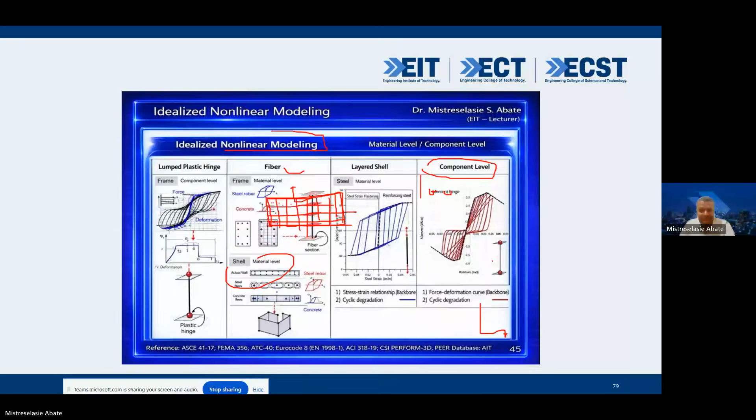That's why you have to select where you need to make it ductile, and it's better this way. This is what I told you. But in Perform 3D, you have to give component types.

Geometric nonlinearity, as we know, linear, we have geometric nonlinearity and material nonlinearity. Depending on your structure, whether you need P-delta, first order or second order, it depends on your MC level. This is the geometric nonlinearity, P-delta, big delta, and small delta.

This is the imperfection I told you about. The imperfection load should be captured as a notional load, and small P-delta is for the component level. But big P-delta is for the analysis.

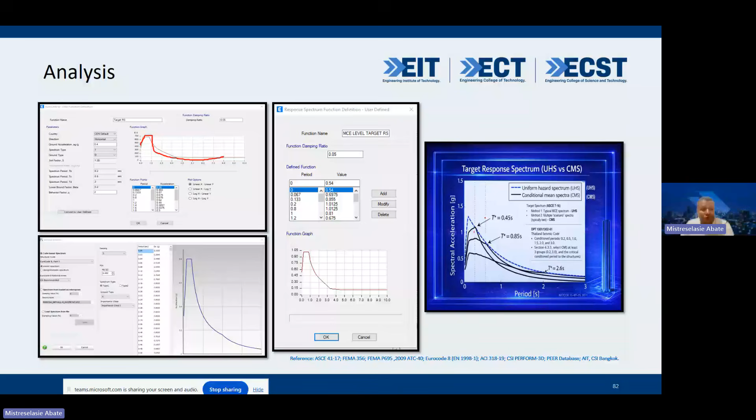We have the target response spectrum, and as you can see, the target response spectrum depends on the location. Once you know your target response spectrum, you have to match it. This is SeismoMatch, and you have to bring all the earthquakes, 11 earthquakes, define your response spectrum, and do the matching. After matching, it will give you a target response spectrum like this, and it will show you both before matching and after matching.

For example, this one, you see, this is the target response spectrum, the red one, and this is the mean matched. Once you match it, the 11 earthquakes will be matched. So from 0.5 T1 to 2T, the fundamental period, it should not go down, and this is what it shows. You see the ground motions before matching, and after matching you see they are concentrated here.

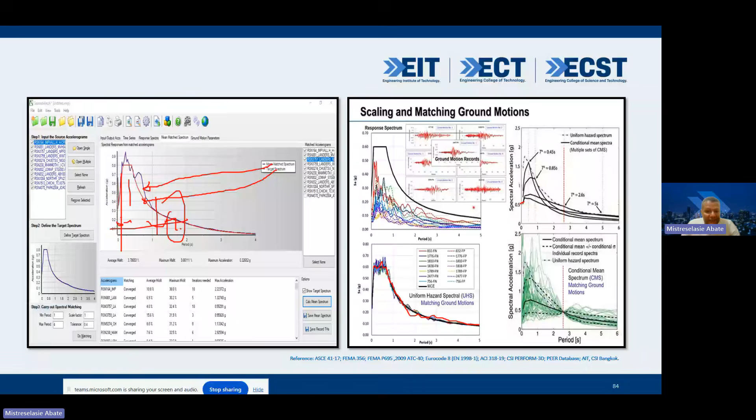This is the same thing before matching, and this is also the same thing, for different damping. You can choose different damping and you can match it. And this is also the same.

This MCE level, 2/3 will be the DBE level. So you have 11 ground motions, you're going to match them and apply them in your building. This is the complexity of going from linear to nonlinear analysis. This is very complex.

So, uniform hazard and conditional mean hazard. Uniform hazard has the same probability of exceedance at all periods, and the spectral shape of UHS may not represent the real ground motion, so it is conservative. Only this set of UHS spectra, but conditional mean will match the ordinate of the hazard only at the interested period, which can yield more realistic results. So the conditional mean spectrum is more realistic than the uniform hazard spectrum. That's what we want to show you here.

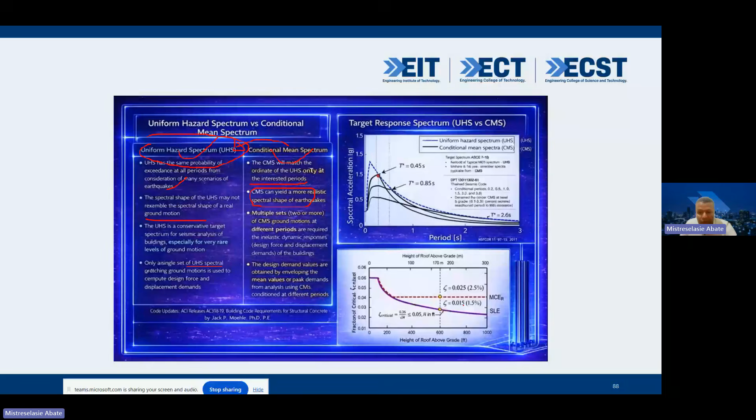Then the service level is 1.5% and the MCE level is 2.5%. So let me go to here.

So this is not linear. What we did was we were here, in the linear analysis. Now we are satisfied, we know the section, we know the rebar, and we go to display and we see story plots, and we can see, for example, for a response spectrum, or wait, this one.

Okay, let's choose one. We want to see the response. This is 0 because we have to choose time. Let's make it maximum, because it will start from 0 and go up, so it will give you the maximum story displacement. As you can see, if you want, you can take it from here, and you can get all the information: displacement, drift, maximum story, story shear, overturning moment, for example, overturning moment.

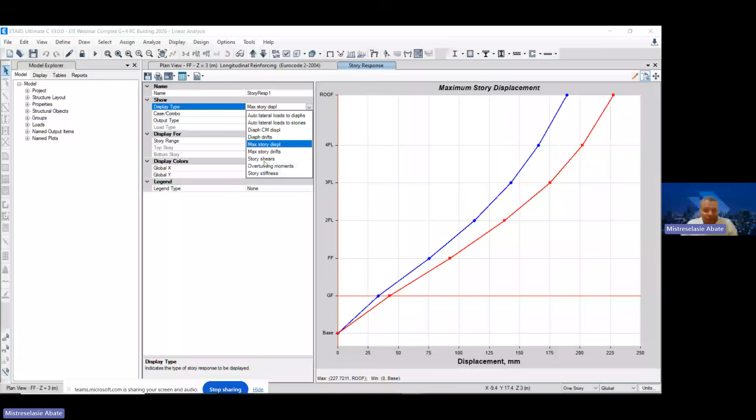And shear force and stiffness. Stiffness, it's working on it, I think. And shear force, this is the shear force. So you can get whatever information you need from here.

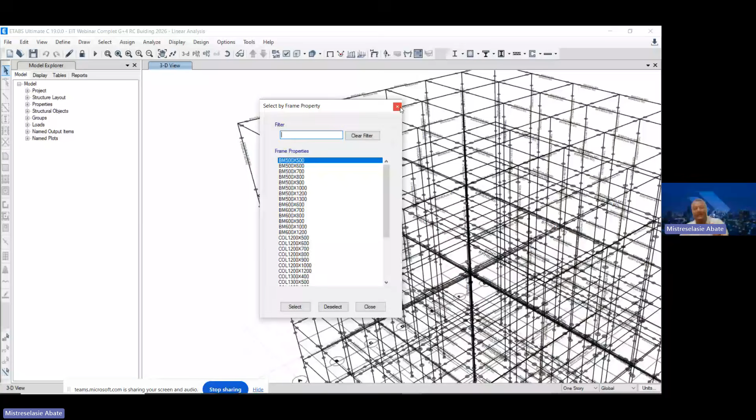Once you do that, you will change this into a nonlinear model. How are you going to do it? Now it is already locked. What we did was we just select, under property frame section, you're going to choose all the sections, then you're going to assign frame, and now it is locked because of hinges. Once you say hinges, it will give you the option, and you're going to apply.

But what I want to show you now, let's see the result. For example, let's go to here, and the time is here.

Let's see if we have 60 seconds, because it depends on the earthquake length, the duration of the earthquake. So you see, at 60 also like this. And you can go ahead, for example, pushover.

Pushover, for example, in the Y direction, we have 10 steps. Let's start from 1 for pushover. Apply. This is for pushover, for example. This is in step 1.

Now in step 2, you see some hinges are already created in step 2 and step 3, and step 4. Again, step 5, and step 6, and step 7. It will go like that. You see, still not fail. We are in the BC direction, range 9 and 10.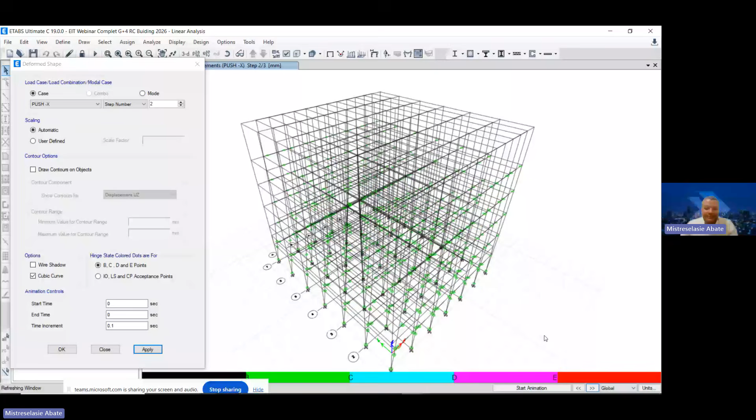So every earthquake, for example, let's go to Loma Prieta. And let's choose, if it is 0, in the 0 second, there will not be nothing. But let's say at the 10 second, apply. Now in the 10 second of the earthquake, you see, almost the hinges are formulated.

Let's say at 20 second. 20 second already like this. 30 second more hinges. So performance evaluation means like this. You take nonlinear analysis and you are checking now for this amount of earthquake, how your building is behaving. If some of the hinges are red, that means you have to change the cross section or you have to change something. So let's see this one, the same area.

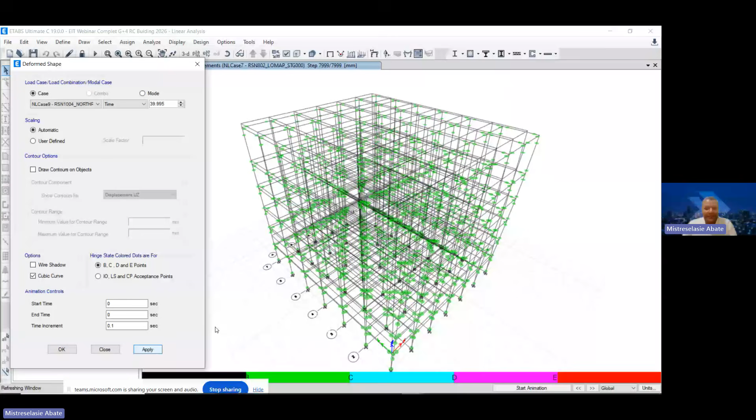Okay, so in this way, you can see again for the moment, for example, if you want to see the moment and everything, let's see, for example, moment, apply. But now it is 0, because we are here in the 0. Can you make it max? In the maximum, for example, the maximum moment.

Okay, you see? But let's go to, for example, dead. What this one is telling you is that when the earthquake lateral forces, the moment diagram, you see, they will resist it in this direction. For the dead load, it will show you the moment diagram is like this.

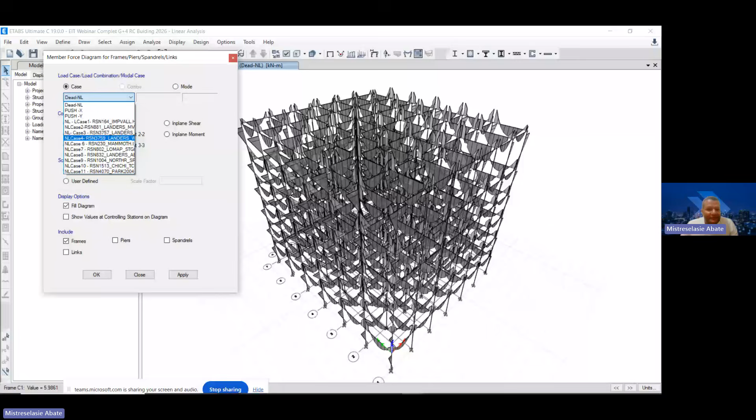I think option, display, white background. Okay.

Okay. So the other thing, because this is nonlinear time history analysis, what we are going to do, if you want to capture the video, you can go here and multiple step, because this is like 30 second, 40 second, 50 second earthquake. So depending on the time, let me show you.

Depending on the time, it will give you, for example, this one. At 0, it is 0. There is no nothing. But if you are in the 10 second, you apply and you will see shear, moment. So what you can do, you can take video from here, capture video, and it will give you the video. This is what you can do, and you can get a lot of information from here.

If you need report, you can go here and, for example, create report, show project report. Okay, now it is generating a report. Until it's generating the report, let's go to our slide. Okay, now I think you have some idea.

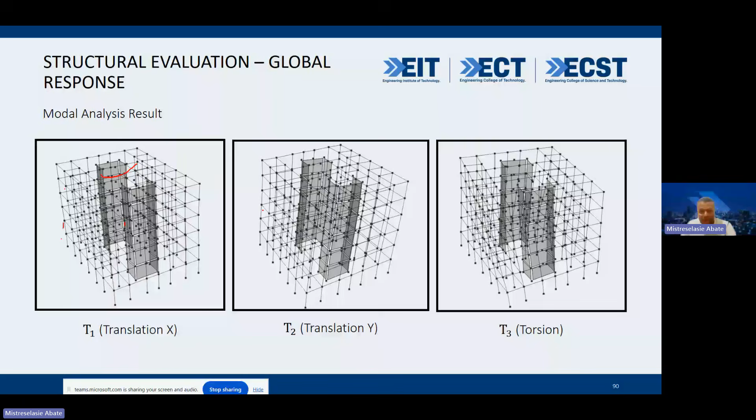So now structural evaluation, local and global response, as we discussed. The same thing, you can take it into performance based. Now I cannot, in this laptop, I don't have perform, but this is our building, G+4. Once you take it, you will check the first is translation, second is translation, third is rotation. And again, you can check for different earthquakes.

Different earthquakes will give you, for example, immediate occupancy level or life safety level in the component. This is component, you see. If you need entire, you can get in the entire. So from elastic to non-elastic, you can see the performance. And this is a combined report. It will give you all the displacement, drift, shear, overturning. I will show you that one.

This is in the perform 3D. It will give you also moment. Moment in shear diagram, as you can see. And you can select a line or point element or section. Maybe in the next webinar, the fourth one, we will do perform 3D results.

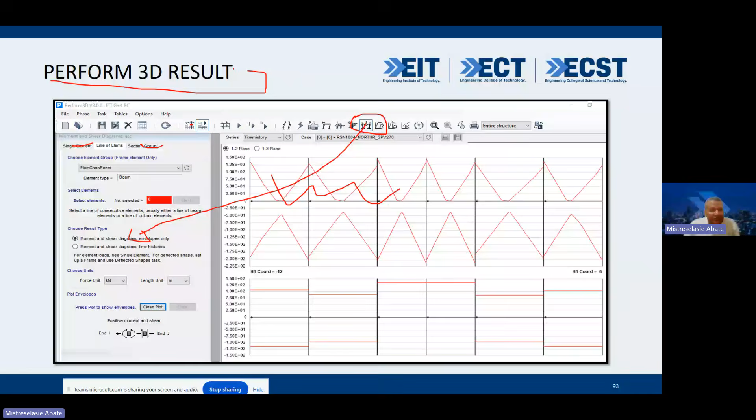And this one also in Perform 3D, you have the option of demand and capacity. So this will be accepted values, and this will be non-accepted values, okay? Demand capacity curve for FEMA 440 idealization.

Once you give the point, and once you define the spectra, for this case we give 0.5 G. And when we check, this is the performance point in the PVD.

The most important tools in Perform 3D are the DC ratio and this envelope. These two will give you the overall result. Because this is, for example, 100, it will give you the DC ratio. For example, we have here one, let me show you 1, 2, 3. If you click here, it will give you the performance. And this one also will give you the performance. So all of the performance should not pass 1.

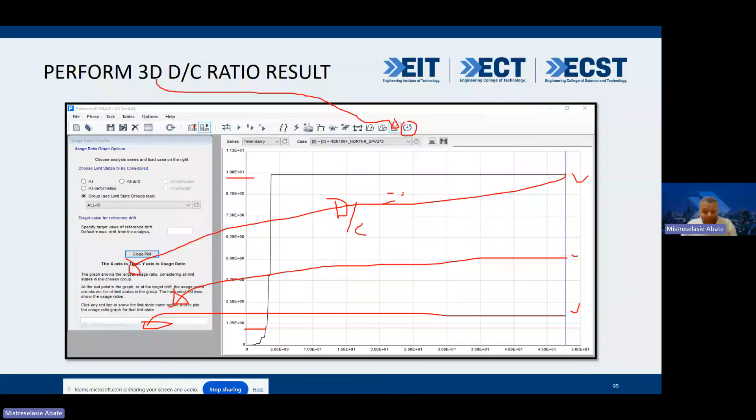If it passes 1, then immediate occupancy, most of the time it will pass. But for life safety, you see 1, this is DC ratio is 1. And you see 1, 2, 3. This is for column, beam, column, and shear wall. All of them are under 1. And you have the choice also for maximum, mean, maximum, and you can choose this, and you can see the performance.

So Perform 3D will give you a better performance check, because all of yours should be under here. And it will give you also energy balance - how much of the energy is dissipated by which component. This is also information you get from there.

So this one, evaluation of local responses, as we said, most of the time we use ASCE 41, ACI 318. And as I told you, maximum you have 11. So once you get the moment, you have to divide by 11 and you will get the force. Deformation also, once you get different deformations, you have to take over 11. This is because you are taking 11 earthquakes. So we have to take the average for evaluation purpose.

So sample result, this is from some of the researchers I took, for example, for shear wall. For shear wall, for example, this is a strain limit. This is for crushing, for concrete, and this is for yield.

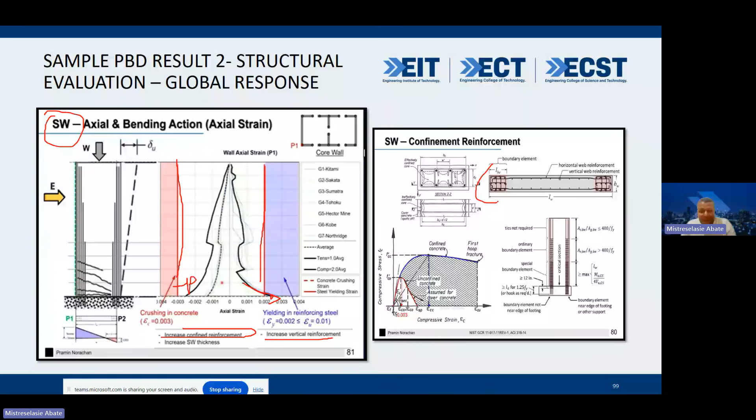And this is for boundaries, and we discuss also confined and unconfined cases. And the strain prediction, as you can see, this side is big because this is in the tension, this is in the compression side.

And this one, as you can see, also we have capacity. This is capacity, this is limit, okay 1.5, because we will multiply the average. The average is 1.5, okay, 1.5 average. This is the black one.

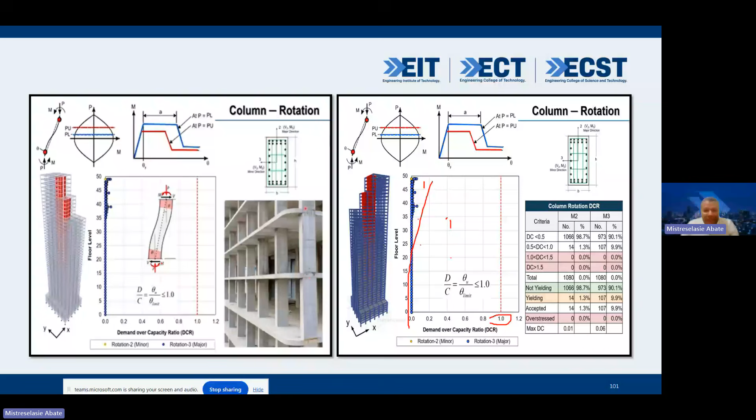And this is in the column. Most of the time, there is not much issue. This is, you see, the limit. But most of yours are very small because DC ratio theta is very small, compared to the slab.

This is demand capacity. For the coupling beam, we have conventional and diagonal. As you can see, coupling beams are very sensitive for earthquake. So what we can do for that also - for example, you see we have L here, from here to here is L. This is theta.

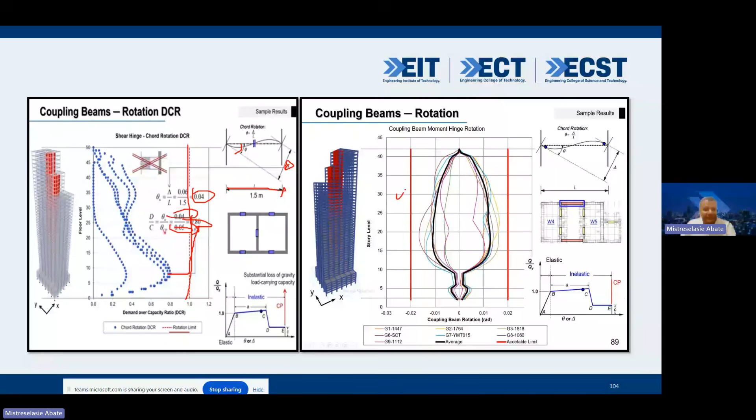So this is the idea of performance-based design. Once you do it, you can see clearly what is the idea. And this is also energy dissipation - in Perform 3D it will give you which amount is dissipated by column shear or shear wall.

And this is for dynamics of structures. You can go ahead and check.

So in general, the advantage and disadvantage of performance-based seismic design. The advantage: more reliable achievement of the intended seismic performance, and suitable for complex buildings, for example irregular structures, multiple towers on single podiums. It allows flexibility beyond some prescriptive code requirements, accommodates challenging architectural features, and enables the use of innovative structural systems and materials. But the disadvantage is high computational effort.

As you can see, extracting ground motion, changing from linear to non-linear in the application of plastic hinge modeling, fiber hinge modeling - even in Perform 3D you are responsible to fill all these things. But ETABS will at least give you the hysteresis loops and other things, and you have to check it. So it's high computational and complex analysis procedure, requiring preliminary design.

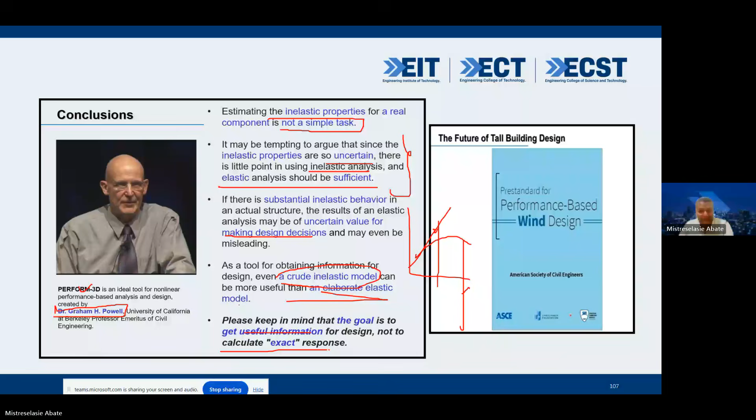So that is some of the published books and papers, you can go ahead and read. But let's go back to our report.

So we say report - as you can see now, ETABS will give you everything: structural data, property, assignment, load, function, analysis result, as you can see here. It is almost 5,000 pages already generated for you because our analysis is nonlinear, okay?

Let's close it. So we see you can display, as we have seen, everything. And let's see, for example, we can see cumulative energy, as you can see here.

For different cases you can see, for pushover for example, versus nonlinear time history analysis. For pushover you see potential energy, but for nonlinear, global damping is included and potential is very small, because this is nonlinear dynamic.

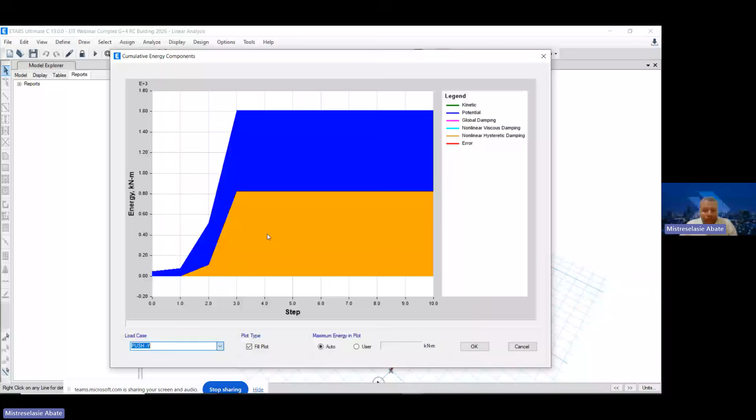If you make it pushover, potential energy static is huge, you know. Nonlinear hysteresis damping we also have, but when you change it into nonlinear, global damping takes up much of the energy.

So you can find qualitative information about the energy dissipation of different earthquakes - you see the whole amount is already global damping. So this is the energy, and the other thing you can get is cumulative energy component, story response plots, response spectrum curves, plot functions, hinge results.

Even hinge results, you can go ahead and check each hinge result. It will give you, okay, from which point it passed or not, you can see. For example, this one is ground floor frame and column level, and this is C9H8 auto - this is the auto hinge.

Basically we give auto, yeah, relative distance we give 0.9. And as you can see, this is the hinge result, and you can change - for example, we have two hinges. So the other hinge also, you see, in the other direction, it will go like that.

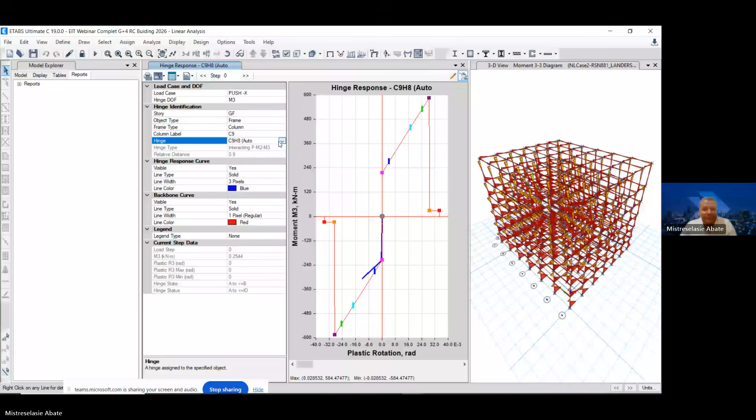And let's go to C2, for example, and we have two hinges - this is one hinge and the other hinge, you see, in the positive X. So you can go ahead and check like this, and depending on the hinge you give, you can find the hinge results. That's what we want to show you.

And the other thing I want to show you - not the design part, the analysis part - display, and you can go to show table. And you can see everything in tabular form: analysis form, joint results, structural outputs, base reactions - everything is here.

That is what I want to tell you. So I hope, from my side, I'm done. If you have any questions, you can ask. Thank you so much.